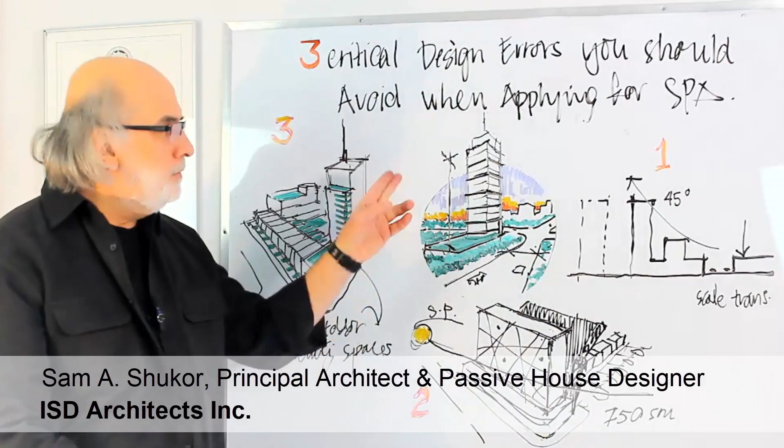So in this video, I'm going to talk about the 3 critical design errors you should avoid when applying for SPA, site plan approval package. Now, before I delve into these 3 errors, I'd like to talk about what a tall building is, because this video is mostly about tall buildings.

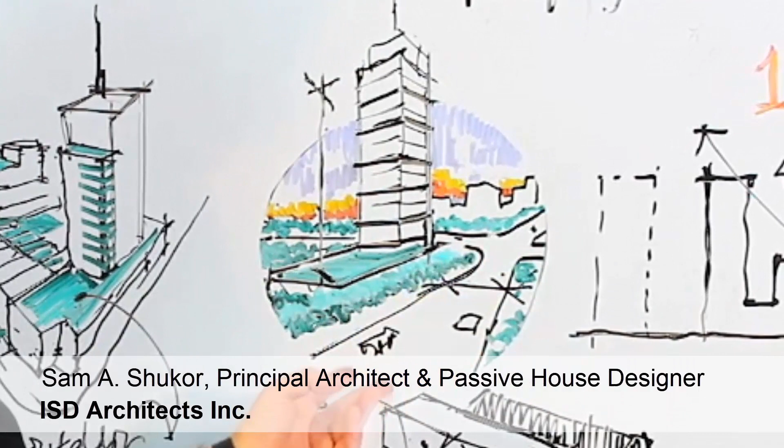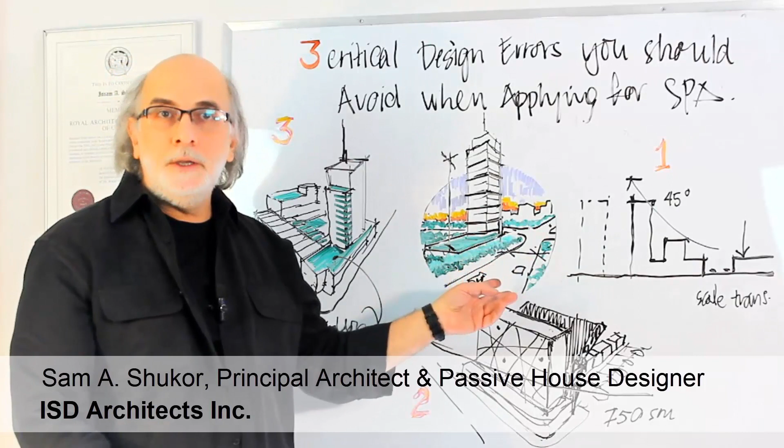Tall buildings are generally defined as buildings with height that is greater than the width or the right-of-way of the street next to it, or 2 streets if the building is at the intersection. Now, the issue here is that these dimensions vary across Toronto and across different cities in Ontario as well, and across Canada, of course. So they're between, I think, 25 to 38 meters in width.

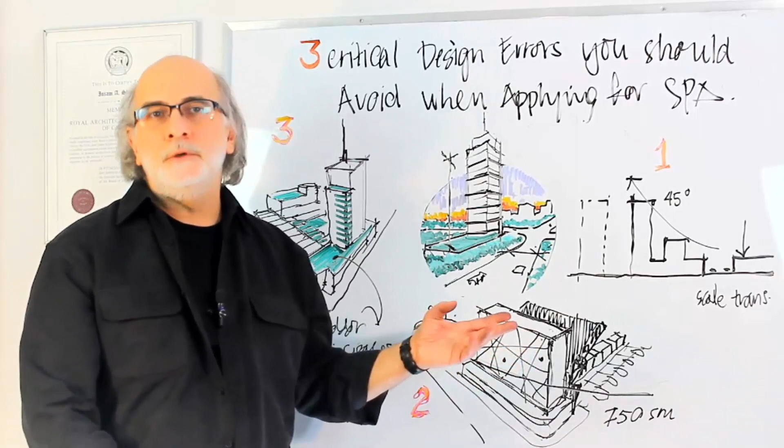A better way of understanding the concept of high buildings is through the site context. So looking at the site and making a judgment call by the architect's team would be the best way to move forward with estimating if you are going higher than the threshold where the project would be rejected. I wanted to get this out of the way before I talk about the 3 critical design errors at the SPA level.

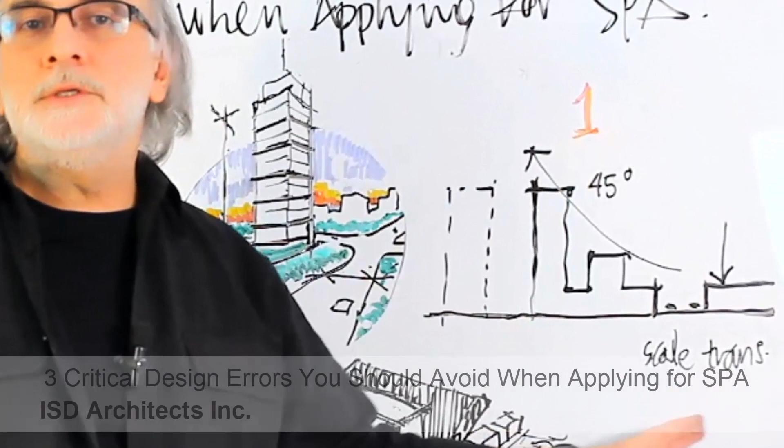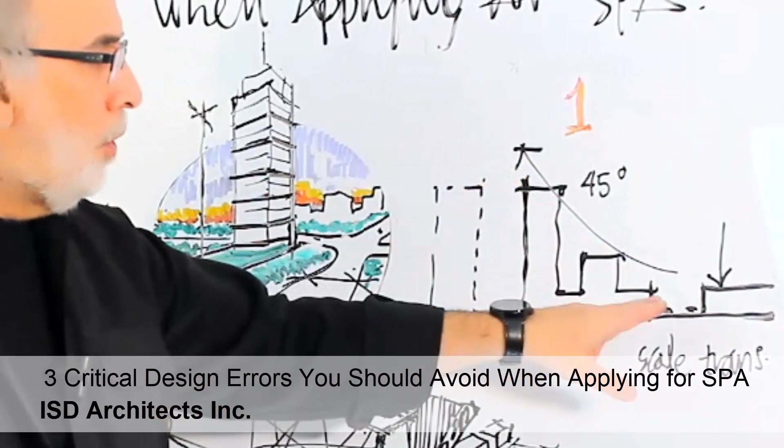Error number 1 is not considering the scale transition from the lower density of your street to the high density of your project or development. This can be defined by the 45-degree plane that you can draw between these buildings, or the lower portion of the building and your tower. You need to either resize the tower by bringing it lower, or push it further from the street. This is a red flag for the municipality that would lead them to reject your project.

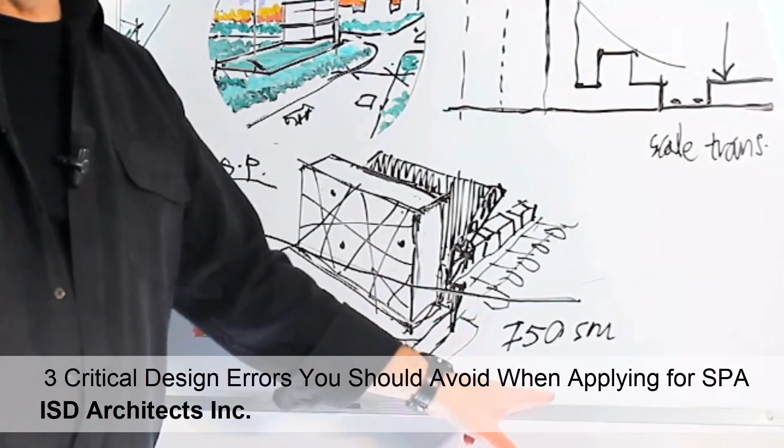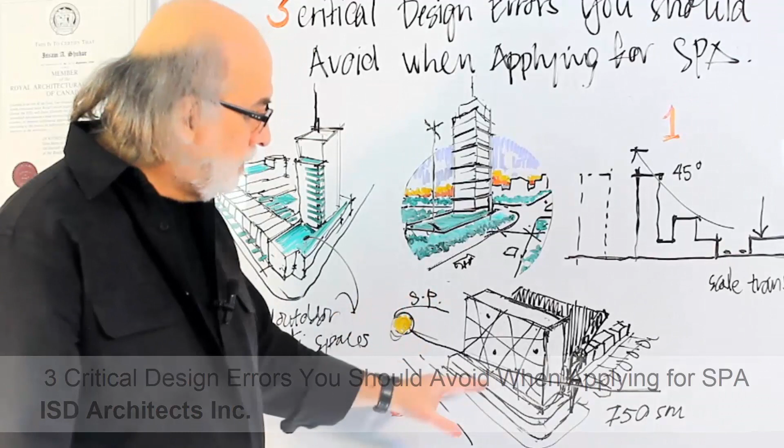Error number 2 is about the floor plate. If you have a typical floor plate for a tall building, as per the City of Toronto Design Guideline, the floor plate should not be more than 750 square meters. The reason for that is from the urban perspective, considering the sun path, as you can see here, this building is a neighbor to other densities, for example, row houses, townhouses or single-family units, and this will cast a huge shadow if the floor plate was more than 750, which is just a number they made as a threshold, including the structure and the exterior walls too.

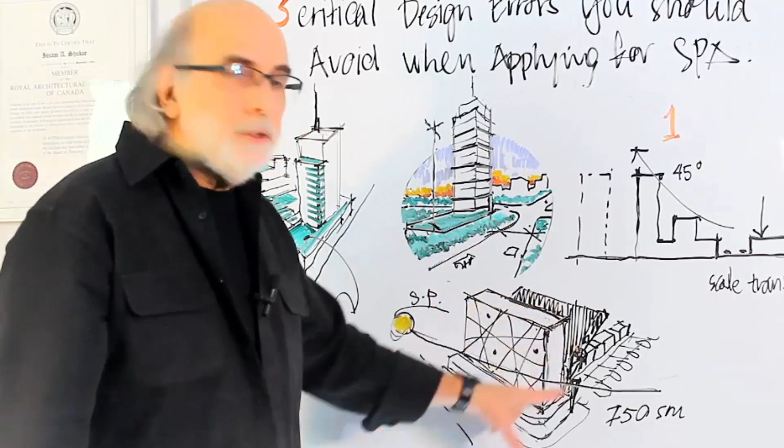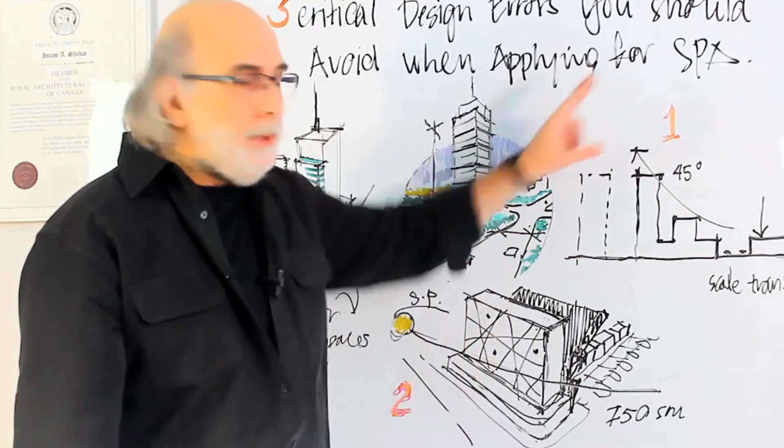My advice is not to have a floor plate that is this long and deep, and there are other reasons why you don't want it this way, but for an SPA application, this would be another red flag.

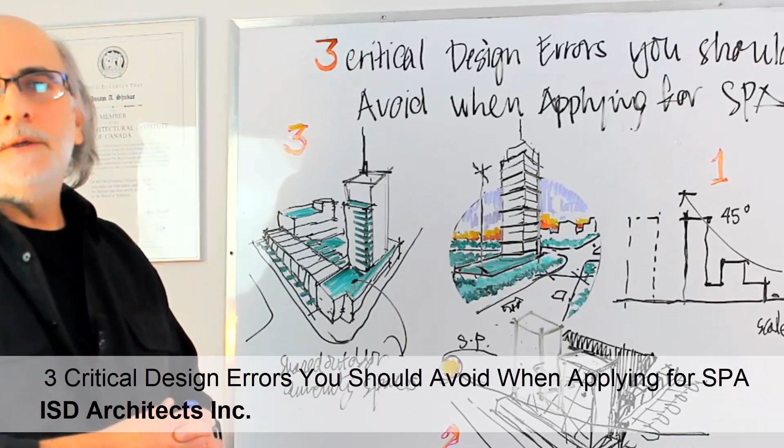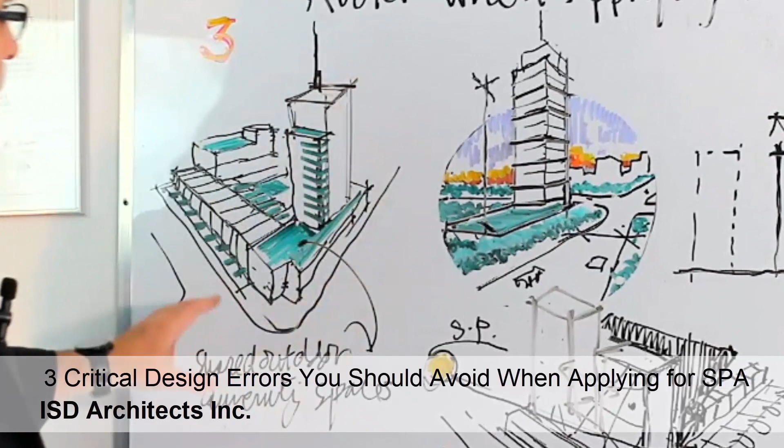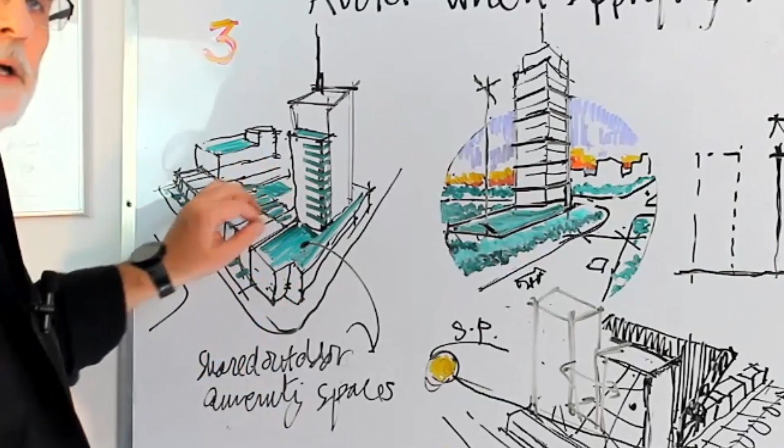Error number 3, which I also find very important, and could be another red flag at the SPA that could lead to rejection of your project, not from the community, probably more so from the municipality and the planning department, is not including any shared outdoor amenity spaces. So in this example, I'm coloring all the shared amenity at a different scale and a different grain. For example, these are townhouses that have backyards and front yards. So this is a must-have in a townhouse scheme.

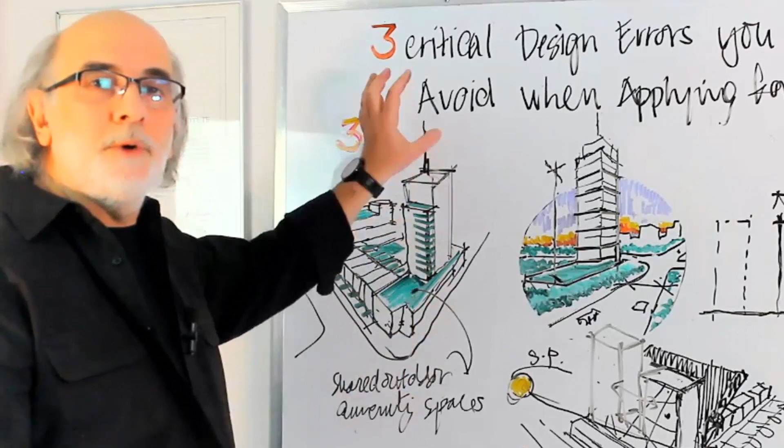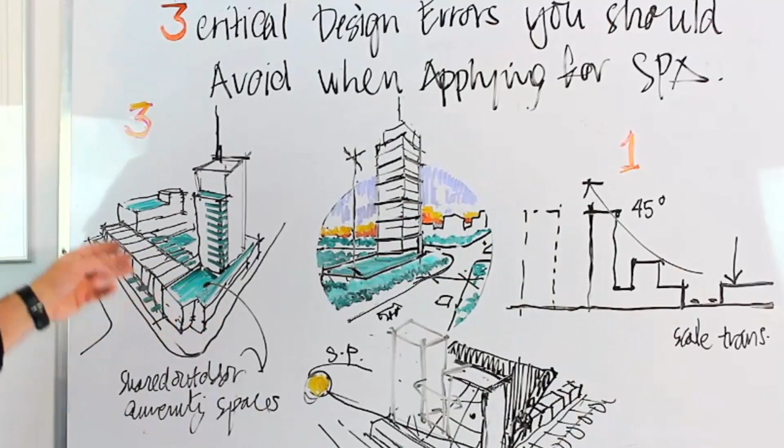But also, if you're building a high-rise residential tower, include an amenity space for the community on the roof of this lower building. Remember when we made this transition in scale? That would be a good opportunity for you, and shows a good understanding of the urban requirements and the tall building requirements, to create an amenity here. If there is a medium-sized residential building as part of your development, then this could also be a very good opportunity to do a landscaped amenity space on the rooftop of this building.

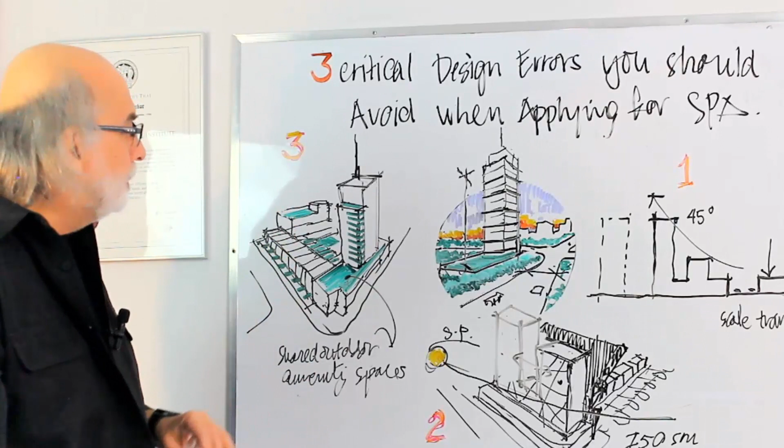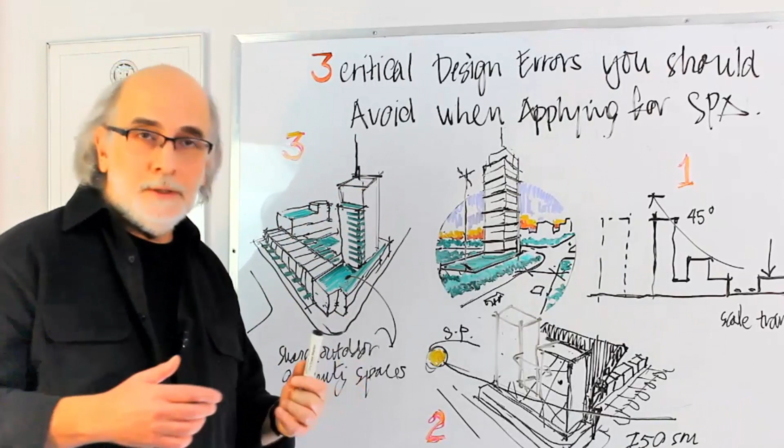All the balconies should be greened as much as possible as part of providing this shared amenity space. So balconies are encouraged in developments, and also if you have any terraces on certain floors, you can provide some greenery, some common or shared space for residents to enjoy.